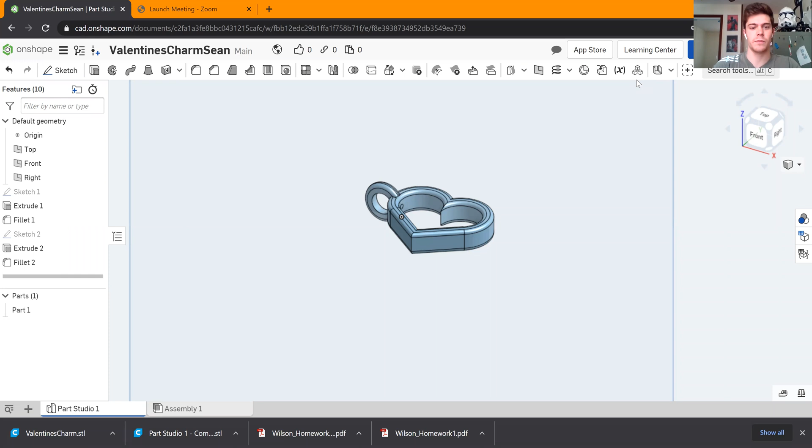The first thing you're going to want to do is sign on to Onshape. If you don't have it, it's a free program, so you just log in with an email. We're going to go over to the Create button and click on Document, and we're going to name this Valentine's Heart Charm.

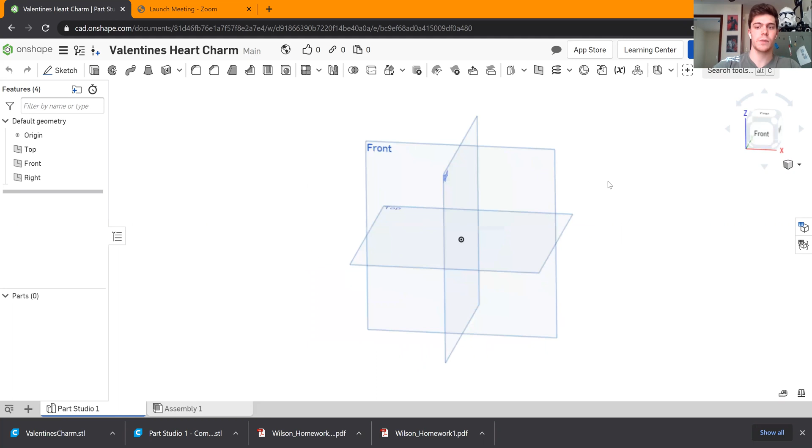This is the main screen. You can manipulate this plane using the right click - if I click and hold right mouse button, I can spin it around. You can also do the same thing by right clicking the cube up here, or move around using the cube by clicking on the corners.

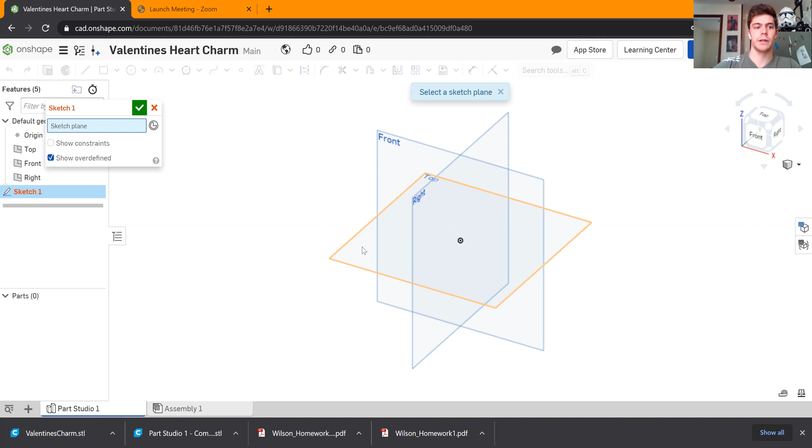We're going to start this sketch by drawing the heart in the top plane. So we're going to go to the sketch tool in the top left-hand corner and click on this top plane. You'll see it's highlighted right now. I'm going to click, and now we're ready to go.

We're going to go over to our line tool, and we're going to want to make this a construction line. This is just going to be a guideline for the rest of the heart. So we're going to click construction, and draw a line out from the midpoint here.

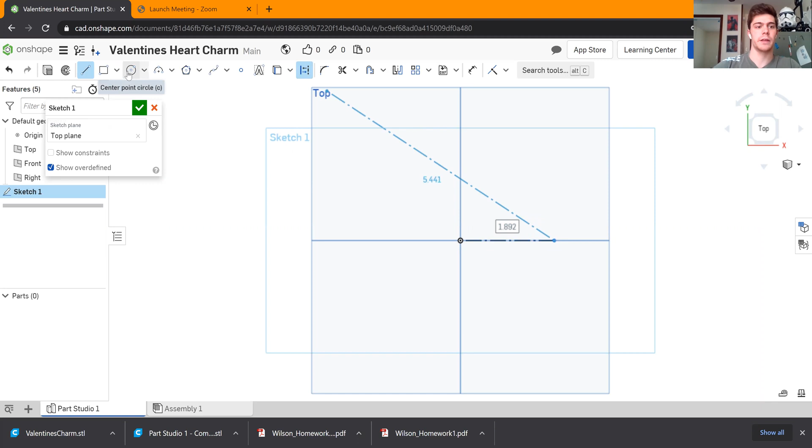Then you're going to want to pick circle - make sure to click it back to a regular circle, not a construction circle. We're going to draw a circle with a midpoint on this line, so hover your mouse over the line, click and drag. We're going to make 2 of these.

We're then going to dimension these to 0.25 inches, so 1/4 inch.

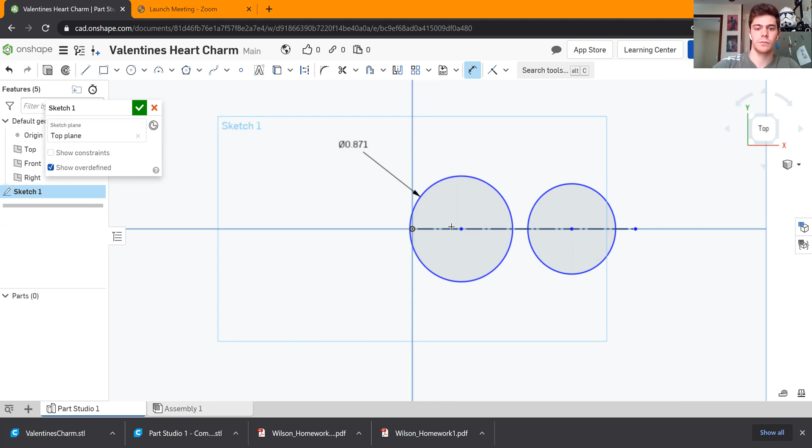Now we want these to touch to make the curves of the heart. So we're going to go right next to the dimension tool - to the right is a constraint tool. We're going to click the drop-down box, go to tangent, and click each of these circles. So now they stick together.

We're now going to use another construction line to cut these circles in half, basically, to make the point of the heart. So click on the line tool, then over to the right click on the construction tool, and right where these 2 circles touch, we're going to take a line straight down.

We're now going to dimension this line to 1/4 inch again. So go to your dimension tool, click on your construction line, and make it 0.25 inches.

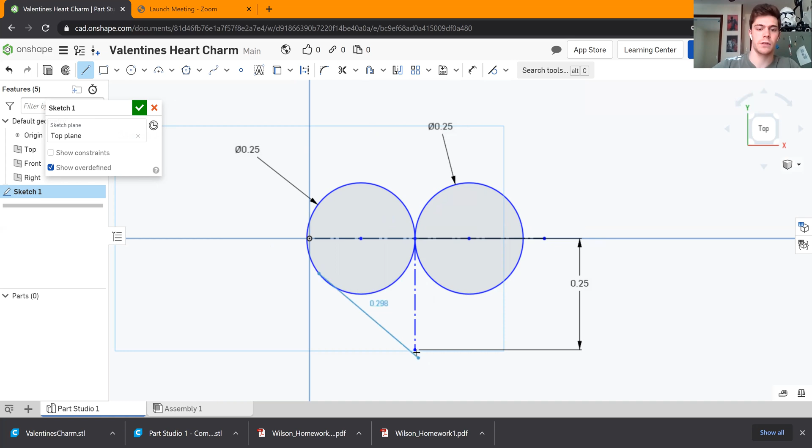Now we're going to connect the circles to the point using a line. An easy way to do this is I'm going to click on the circle to the line, and then from that point to the circle again.

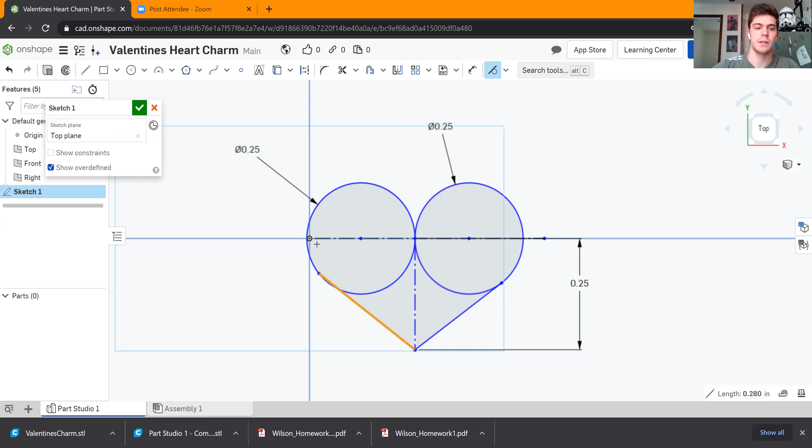Now the next step is to make these lines tangent to the circles again. So again we're going to go up next to the dimension tool to your constraints - the tangent should already be up there from where we used it before. We're going to click tangent, click this line, make it tangent with this circle. Do the same thing on the other side, so this line is tangent with this circle.

Now what we want to do is make this heart hollow in the middle, so we just want a 3-dimensional outline of the heart. So we're going to offset the outline of this heart and extrude it.

First we have to get rid of everything in the middle of this heart. In the toolbar you're going to find the icon that looks like scissors - that's the trim tool. You're going to click on all the parts on the inside that you don't want, so this line and this line.

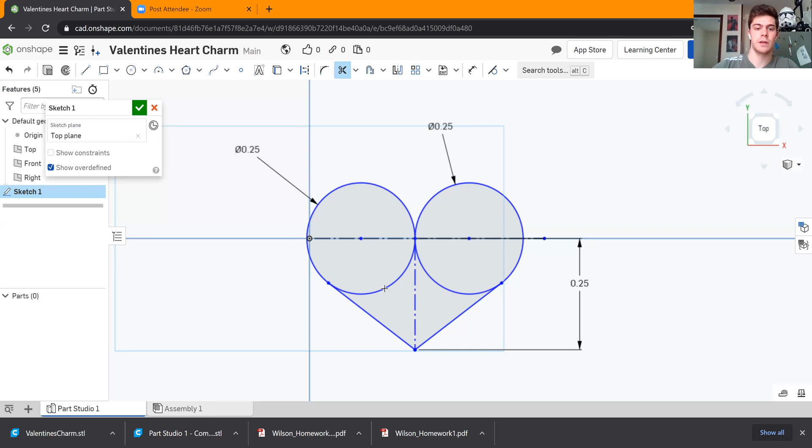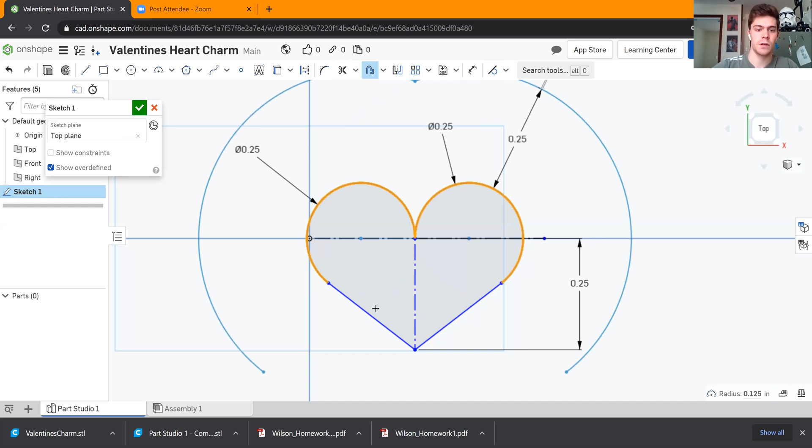We're now going to use the offset tool. Right to the right of the scissors you're going to see offset - click on that. We're going to click on every element of the heart that we want to expand outward: this curve, this line, and this line. Let's zoom out a little bit - right now it kind of looks like a blob, that's okay.

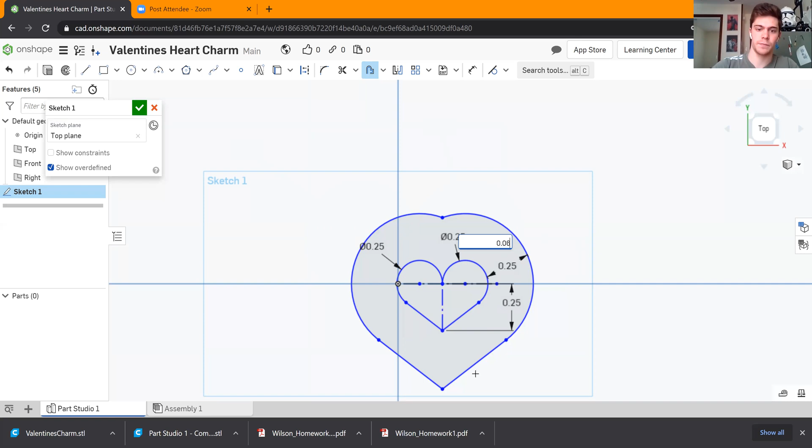We're going to hit enter and you're given a dimension tool. Now to dimension this, we're going to bring it to 0.08 inches, and you're going to hit enter. That looks great - this is small enough to fit on a bracelet, but not too small that your printer won't be able to print it.

So everything here looks good. I think it's time to make this three-dimensional. We're going to click on the green check mark next to Sketch 1, and click on the extrude button next to sketch.

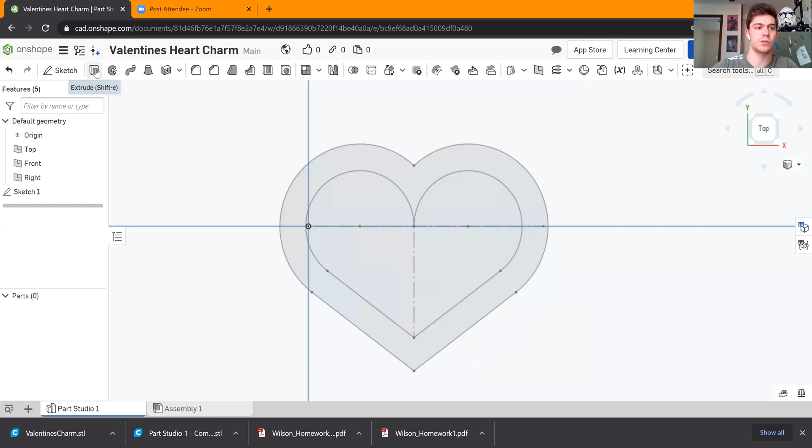You would click on the heart. Right now it's automatically going to extrude it to 1 inch, and if we rotate a little bit we can see that that is very tall and wouldn't look good on a bracelet or anything. So we're going to change this to 0.125 inches.

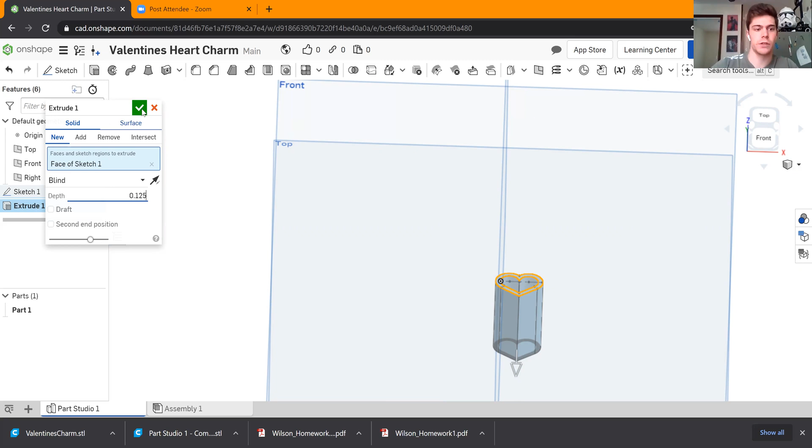All right, and then we're going to hit the green check. That looks much better. Okay, and now we have our three-dimensional heart here.

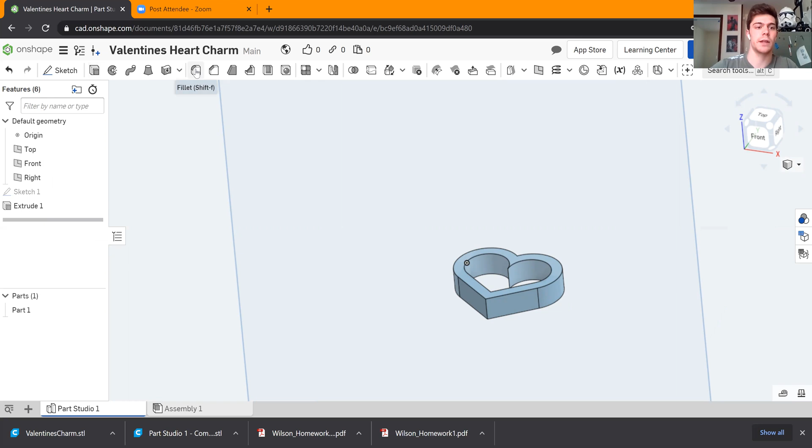The next thing we're going to want to do is round off all the edges because we don't want it to be sharp and hurt anyone who's wearing it. So we're going to use the Fillet Tool. Go to your toolbar and keep going right under here, it says Fillet. We're going to click that, and then click the top and bottom faces of this heart, so not an edge, but the actual blue part.

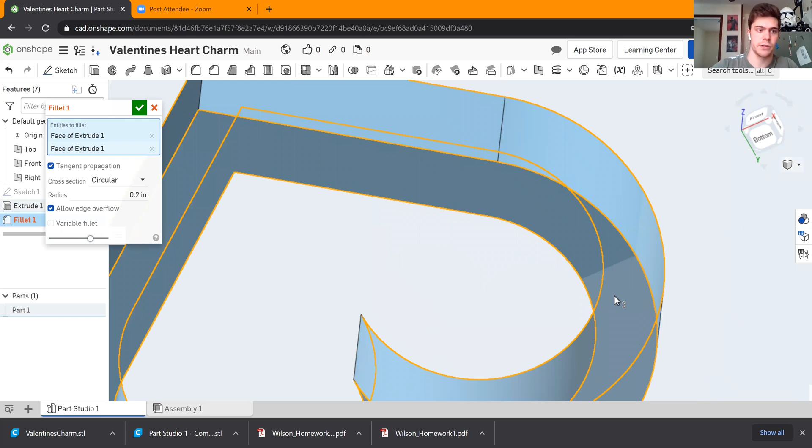You see how the entire outline is highlighted. We're going to click on the top, and then rotate underneath and do the same thing for the bottom right here. So you'll see under Fillet 1, it says face of extrude 1 and face of extrude 1, so we know we have both faces, top and bottom.

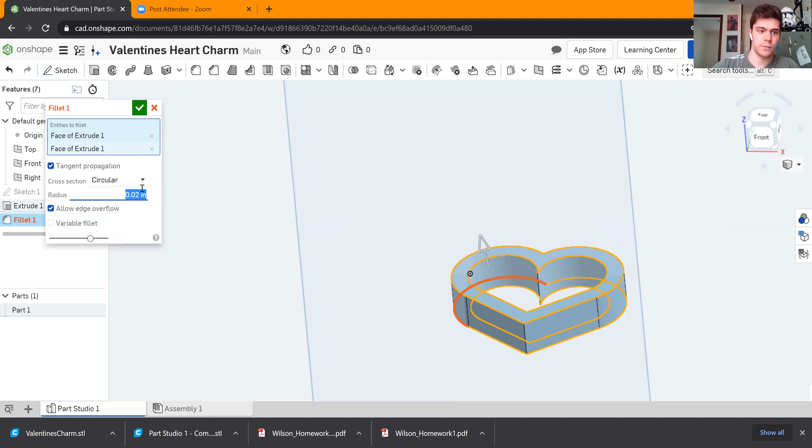You also notice that right now it's red, which means that it cannot fillet to the radius that it's automatically set to. We're going to fillet this to 0.02 inches and hit the green check mark. I think that looks pretty good.

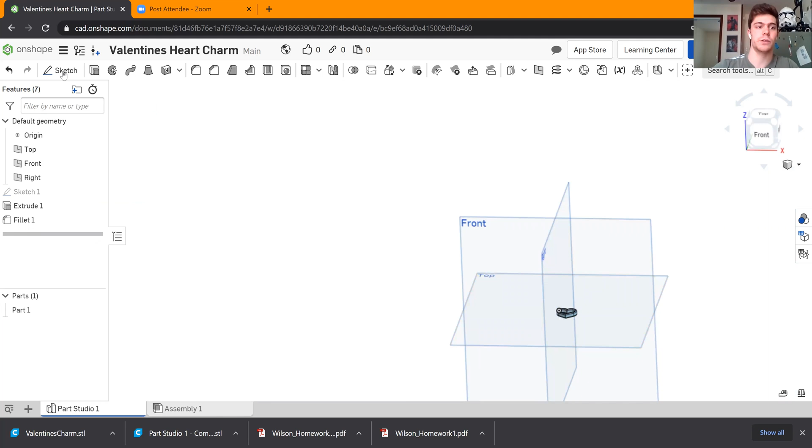Okay, the next step is to make a loop that will allow it to be attached to a bracelet. To make it hang nicely, we're actually going to put this on the front plane here. So we're going to go over to New Sketch, and click on Front Plane. Again, to help you with your sketch, click on the front on the box tool in the corner. That gives us a nice view of our workspace.

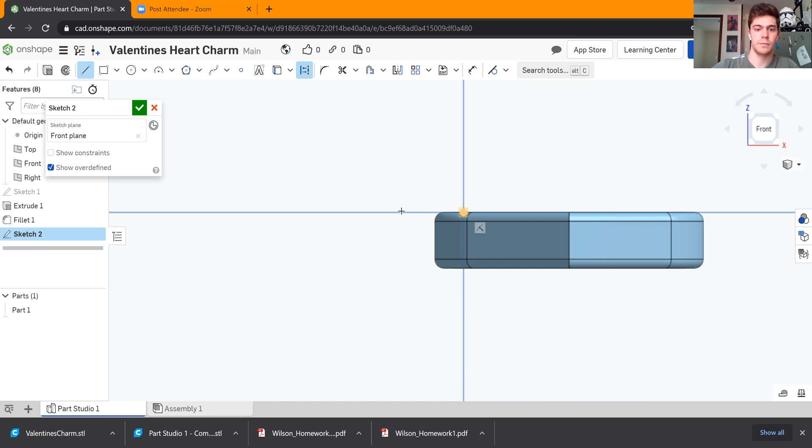Now, you're going to want to make a construction line from this point here. Drag it outward, it doesn't really matter how far, this is just to guide us along with our lines. Escape line, and then you're going to use the circle tool.

So we're going to make a nice circle here, and we're going to dimension it to 0.125 inches.

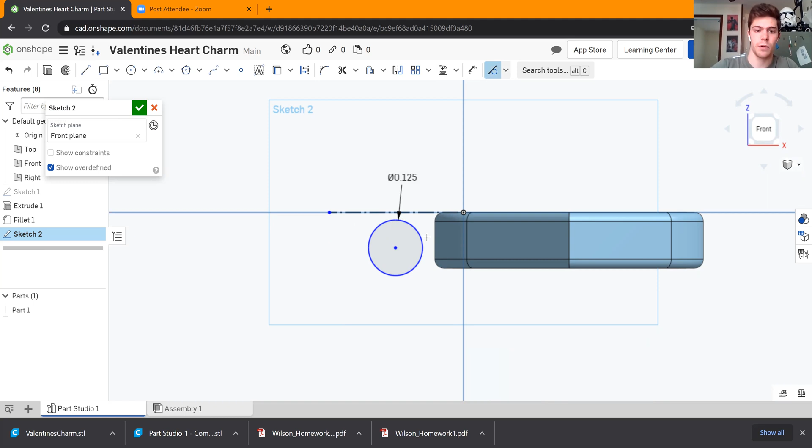Perfect. Okay, and then go to the right of the dimension tool and click on the tangent constraint again. We're going to click the circle and then the construction line we just made, so that way we know the hole is lined up with the actual heart.

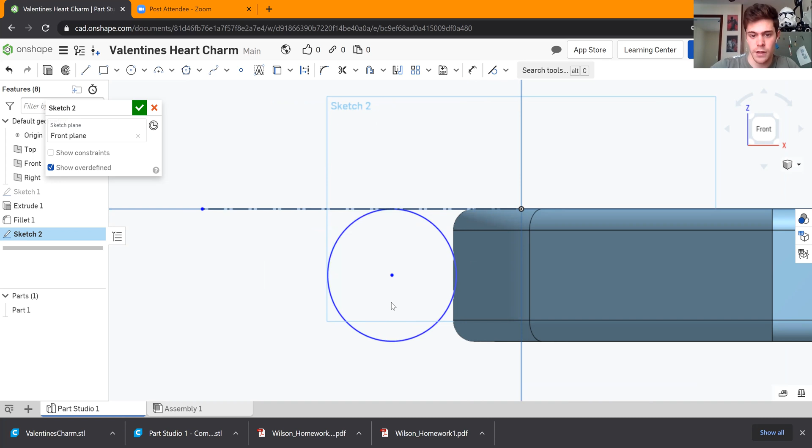What that also allows us to do, if we escape the tangent, is we can grab the point in the middle of the circle and move it anywhere we want along this line. So what we're going to want to do is move it just so that it's touching the edge of the heart. Now, if you want to double check where it is placement wise, you can go back and you'll see it's right on this outside edge.

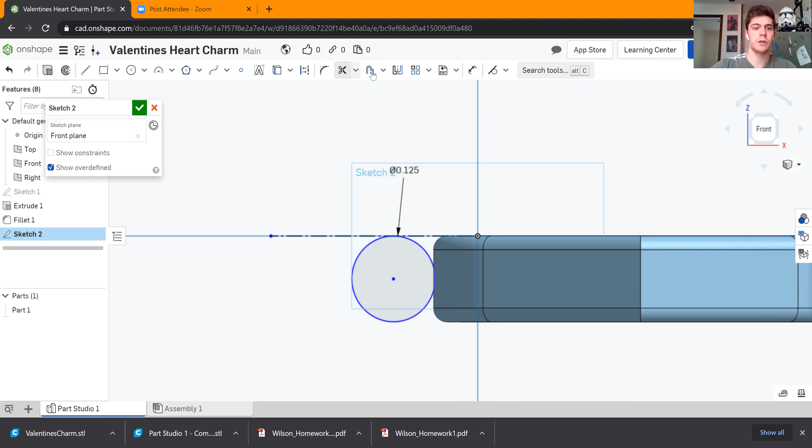And then we're going to offset this circle by 0.05 inches. So next to the scissors, offset tool, click on the circle, hit enter, and we're going to make this 0.05. Perfect, hit the green check.

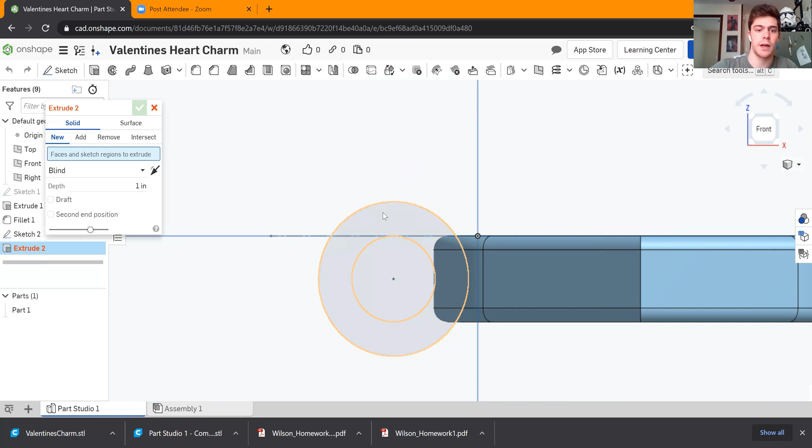And we're going to extrude this. Now this is a little different than the last extrude that we did. So we just did a regular extrude last time, but if we look at this now, even if we extruded it 0.125 like we did with the heart, it looks a little goofy.

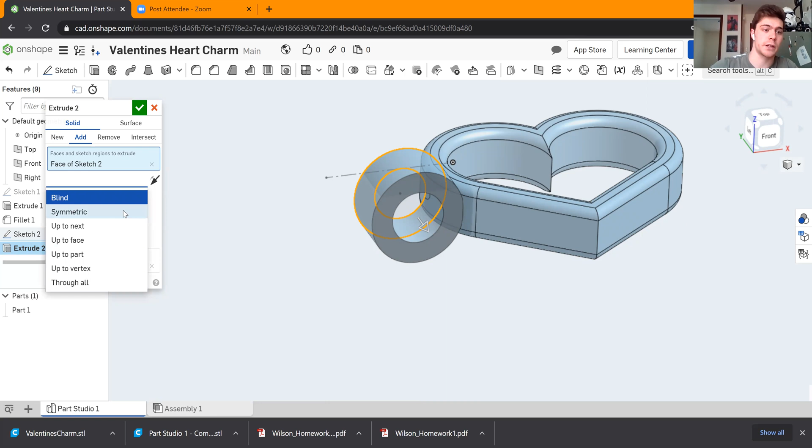So what we're going to do is go where it says blind in your extrude toolbar. We're going to click the drop down box and use symmetric. What that does is it extrudes it from both sides of the plane.

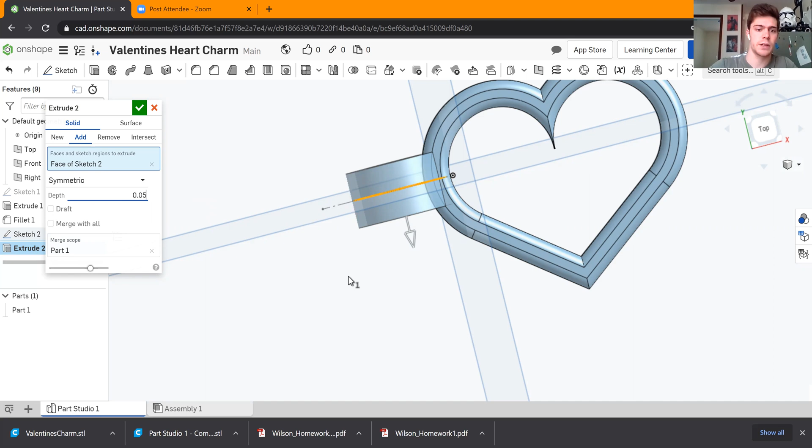If we look now, it looks a little too big to me. Let's just extrude it 0.05 on each side, so that means it'll be a total of 1/10 of an inch. Let's see what that looks like. That looks a lot nicer to me. And then we're going to click the green check mark.

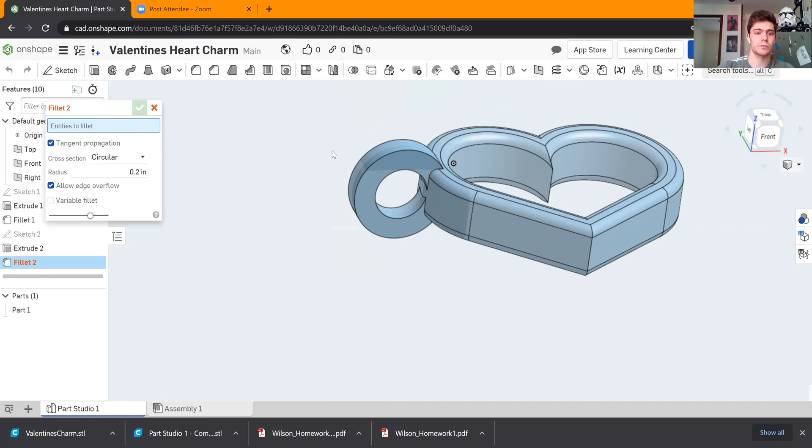Perfect. Now, one last step I think we need to do is to round out the edge on this loop as well. So we're going to go to the Fillet Tool, and we're going to click each edge, and again we're going to make it 0.02. And hit the green check. And I think we're just about done.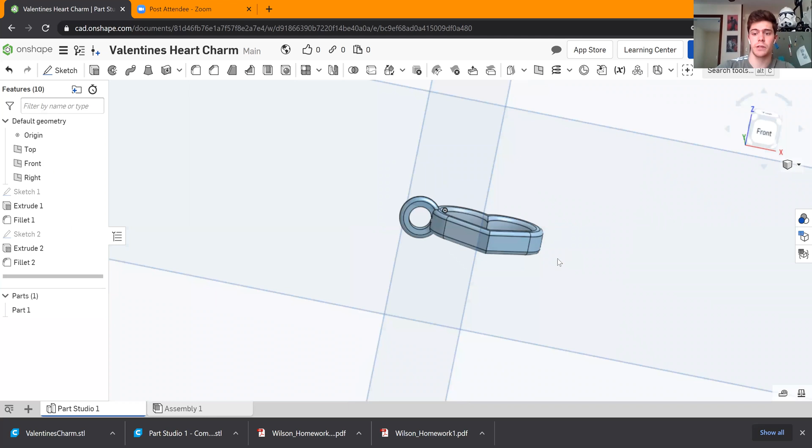That looks perfect, guys. Now, if you're looking to export this to 3D print it or send it to the 3D printing club to print, what you're going to want to do is where it says parts right underneath your features, you're going to scroll all the way down and you're going to see part, right click on that, and then go to export.

Okay, and it's going to give you these options. Name your file, make sure it's in STL format, and also make sure that when you export it, your units are in millimeter. Otherwise, it'll be a lot harder to print for us. So make sure it is in millimeter. And then you're going to click OK.